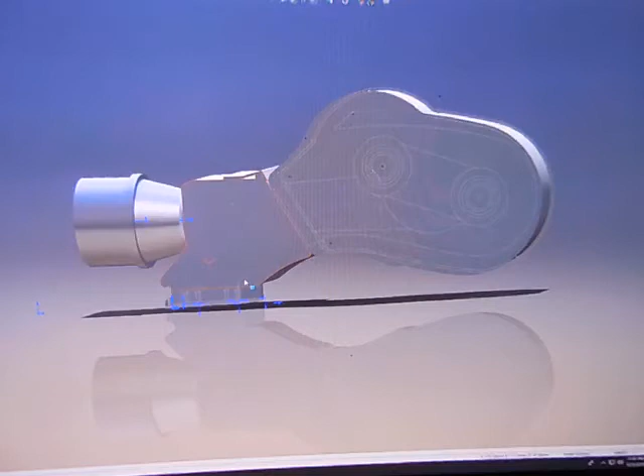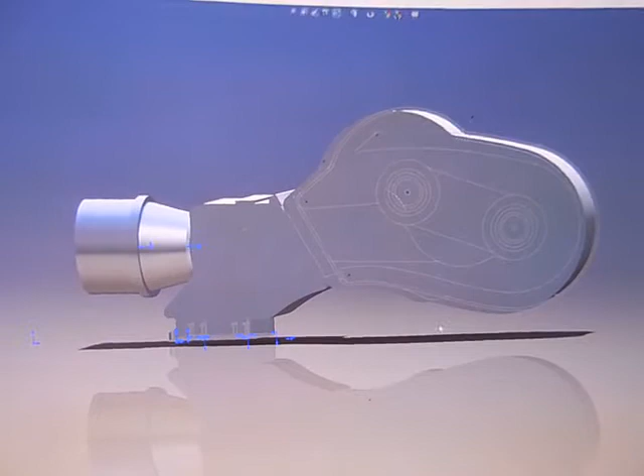It is 1:41 a.m., December 4th, 2019. I've put approximately 1 million hours into what was going to be an Arri 235, but I didn't really get as far as I wanted to.

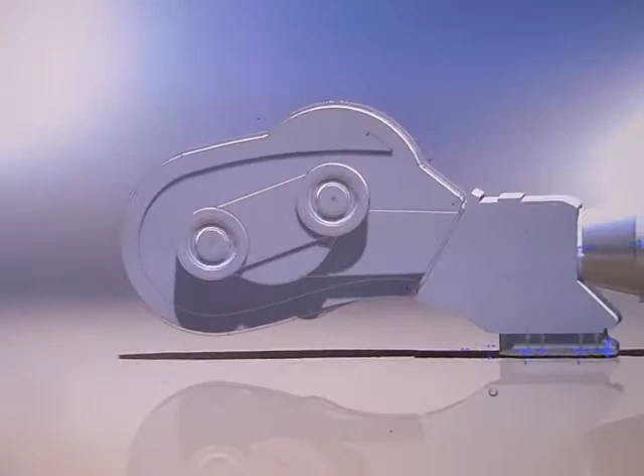So I've just got some rough cut parts here. Actually, the magazine is pretty well fleshed out. This little swooshy thing isn't really flat like that, but anyhow, I got the shape right. This little hump on the bottom is pretty critical because the weight of the camera is borne by the bottom of the magazine and the hump. So all this is correct, and that really is the critical stuff, the curves on the profile on the bottom.

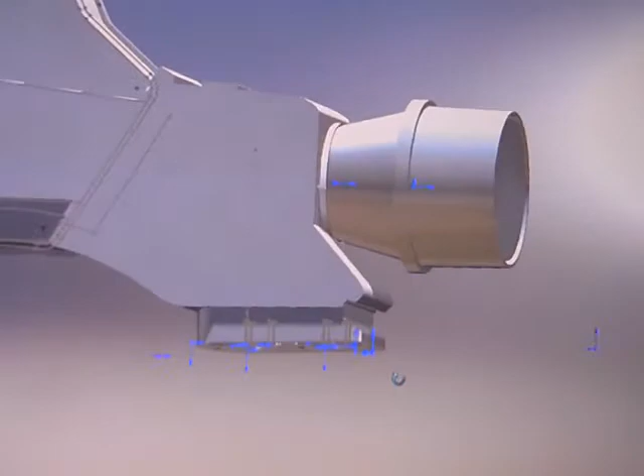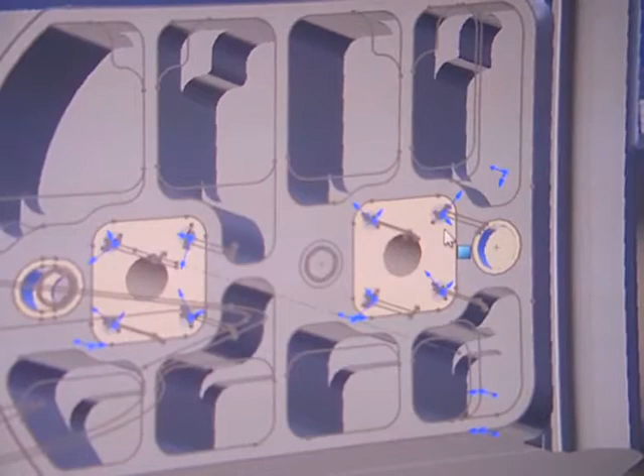And here's the riser plate. The riser plate is milled out to 3 different depths, and there are 2 little stainless steel blocks held in by 4 screws each. The purpose of that is, well, they have 3/8 inch threads in them, and it's nice how they distribute the load throughout the block there.

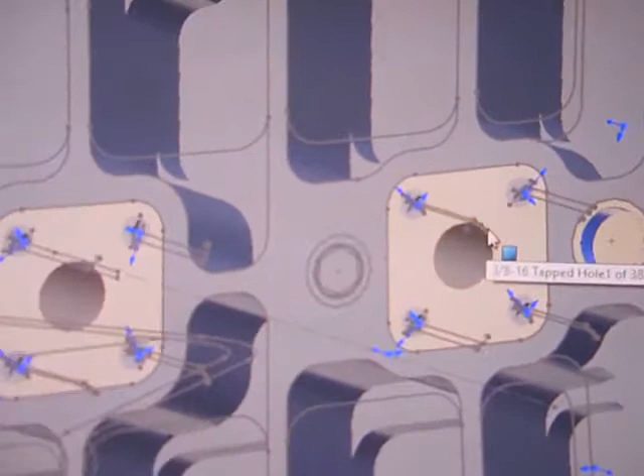And then there's these little bushings here for the orientation pins on tripods. This one is oblong, and this one here is round. And these little stainless steel plates are held in by... where's the move component? Oh sorry, rotate component. There we go, the screws turn.

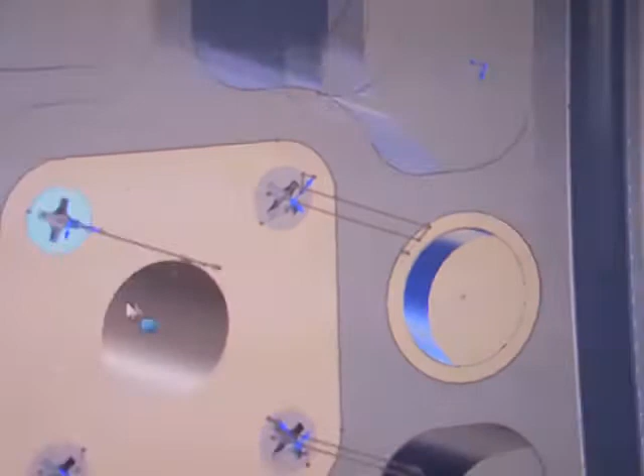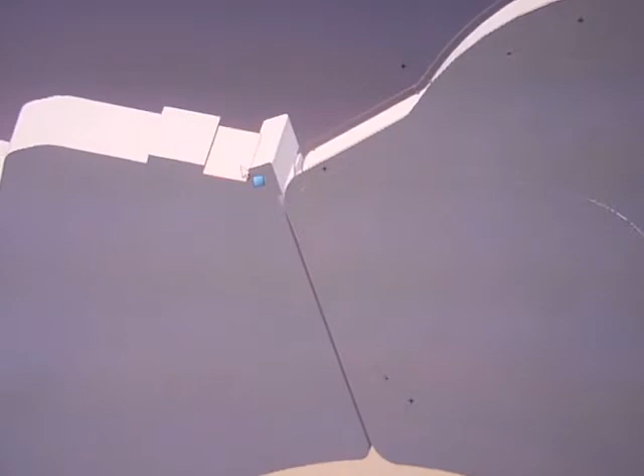I don't know why the whole thing's moving. It should be fixed. Well, anyhow, something's not fixed in place here because the whole thing shouldn't move when I turn the screws. Now I'm trying to pan it, which requires 2 hands. There we go.

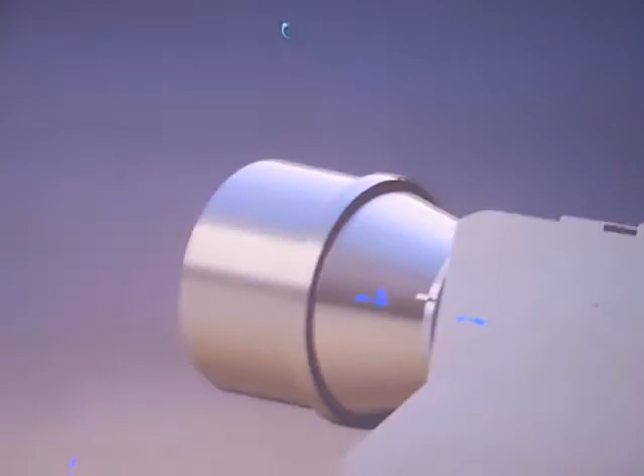We've got a nice lens made of zirconium. That was expensive, almost as expensive as a real lens. The profile of the camera is correct. What's not correct is... no, I guess that's correct too, the distance between the plane of the camera and the plane of the magazine side.

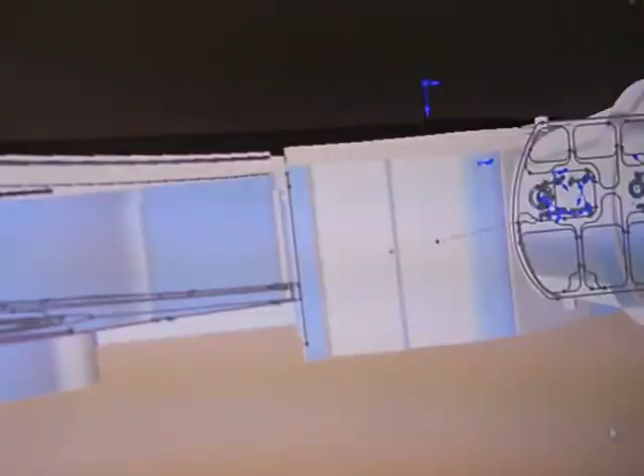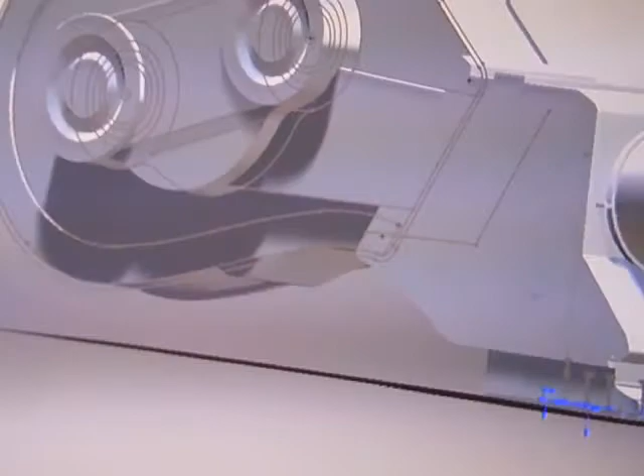So the magazine has got a lid on it. It's kind of hard to make out, but it's held in place right now. I can't pull it off. Not really sure what else to say about this other than, zowie.

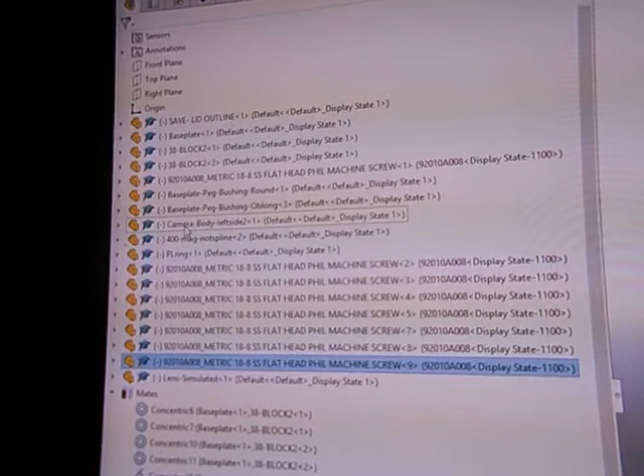1, 2, 3, 4. Well, it's supposed to have 8 parts. 1, 2, 3, those don't count. 4, 5, 6, 7, 8, 9. I guess I got 9 parts. Anyhow, that's it.